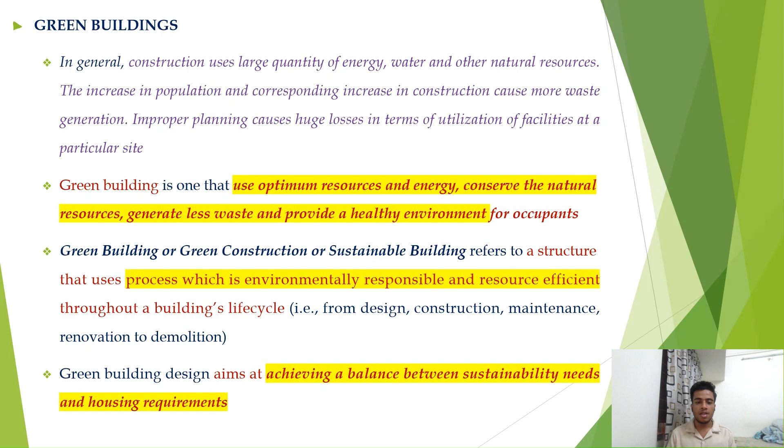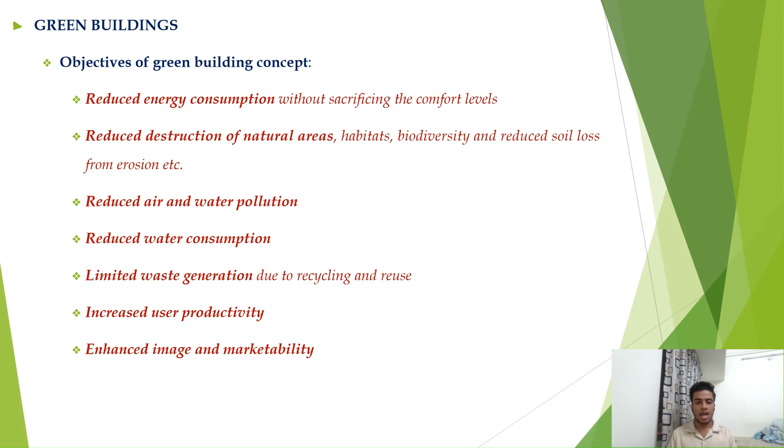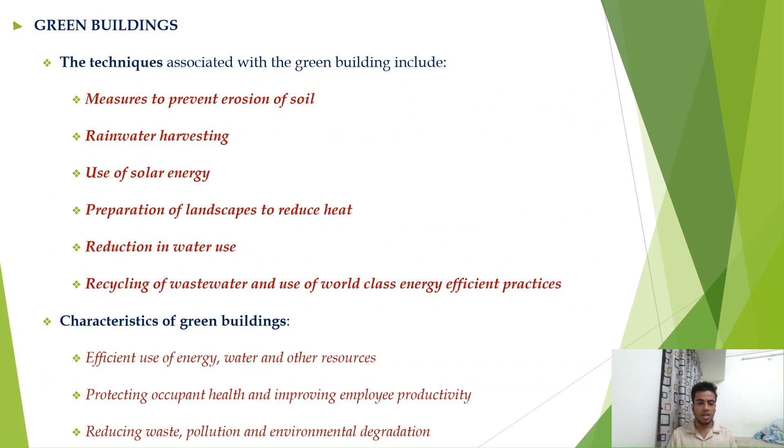The techniques associated with green building include measures to prevent erosion of soil, rainwater harvesting, use of solar energy, preparation of landscape to reduce heat, reduction in water use, recycling of wastewater, and use of world-class energy efficient practices. Efficient use of energy, water, and other resources, protecting occupant health and improving employee productivity, reducing waste, pollution and environmental degradation.

Some of the key features are proper site selection. Site selection is crucial for many reasons. It is important to be close to roads, schools, and amenities as it lowers living cost and avoids wasting resources. It should consider the environmental concern, that is, whether there is any destruction of forest, wetlands, agricultural land, proper orientation of housing facilities, natural ventilation, heating or cooling, and thus energy consumption for these processes can be reduced.

Also, the possibility of harnessing sunlight must be utilized in order to use it for natural lighting, heating, or electrification. Structural design efficiency. In the design phase of a building, it is very important to consider the life cycle of materials used. Each building material and its effect on occupants, resources, and the environment must be checked properly. Materials harmful to the environment must be avoided and alternatives must be used creatively.

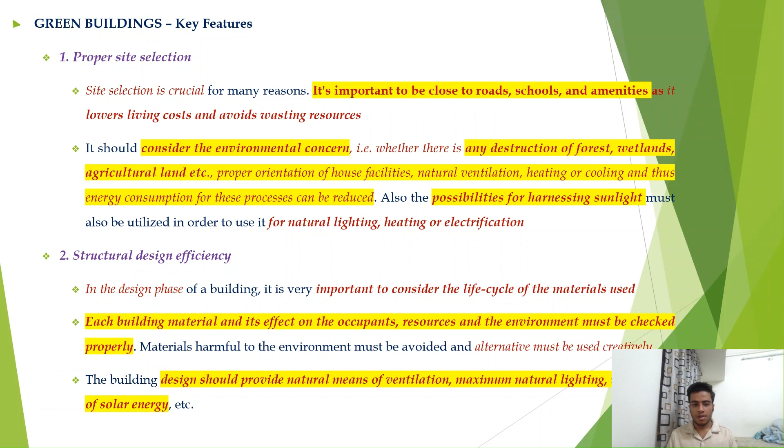The building design should provide natural means of ventilation, maximum natural lighting, utilization of solar energy, etc. It should be a priority from the beginning of the installation and maintained throughout the entire process. During the construction, building materials and processes must have low energy consumption. During operation, if windows and the ventilation are properly placed, the energy required for heating, ventilation, and air conditioning (HVAC) can be minimized.

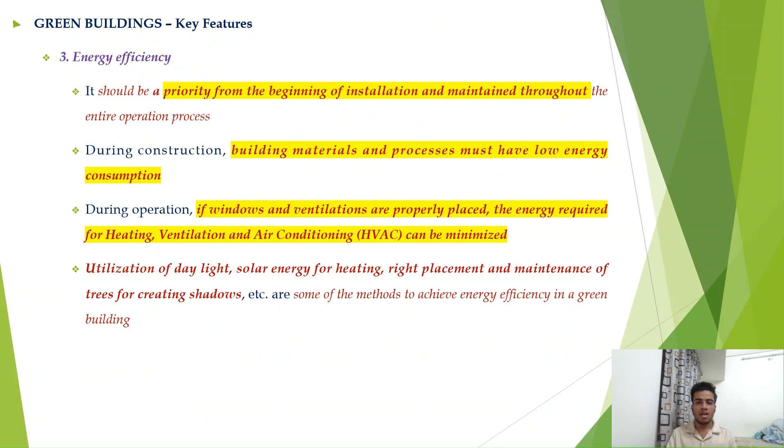And water efficiency. Reduction in water consumption and protecting water quality are equally important. In green building, both these requirements must be addressed. Facilities for water collection, treatment, recycling, and reuse are important factors in the implementation of green building. Water harvesting must be done properly to collect fresh water available from nature.

An ultra low flush toilet, which uses as little as 6 liters of water per flush as opposed to 13 to 15 liters in conventional flush tanks, and low flow shower heads are examples of water conserving devices in green building.

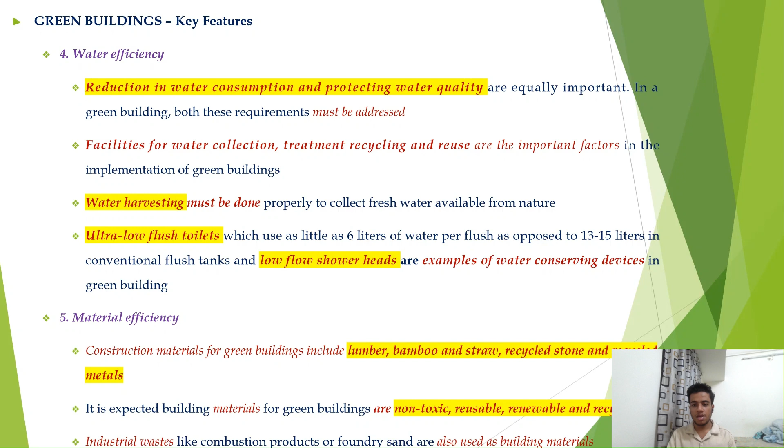Material efficiency. Construction materials for green building include lumber, bamboo, straw, recycled stone and recycled metals. It is expected that materials for green building are non-toxic, reusable, renewable, and recyclable.

Indoor environment quality enhancement. The three important parameters coming under this objective are indoor air quality, thermal quality, and lighting quality. In indoor air quality, the main issues include the reduction of volatile organic compounds and moisture, which can cause bad odor and toxic emissions and presence of bacteria. The HVAC system, the building design and materials should be used to naturally regulate the indoor environment whenever possible.

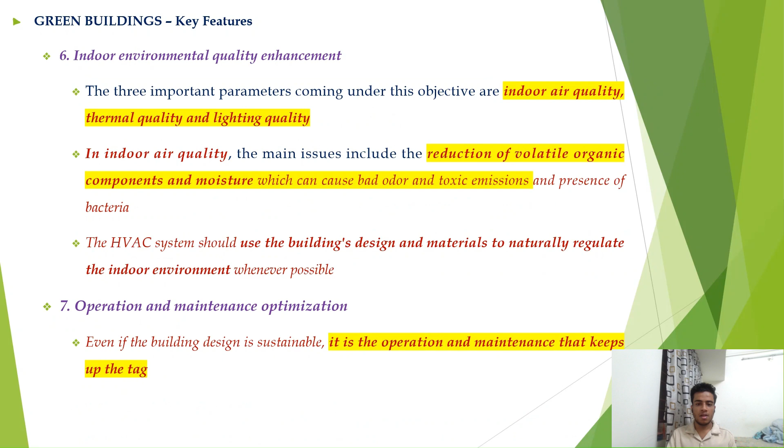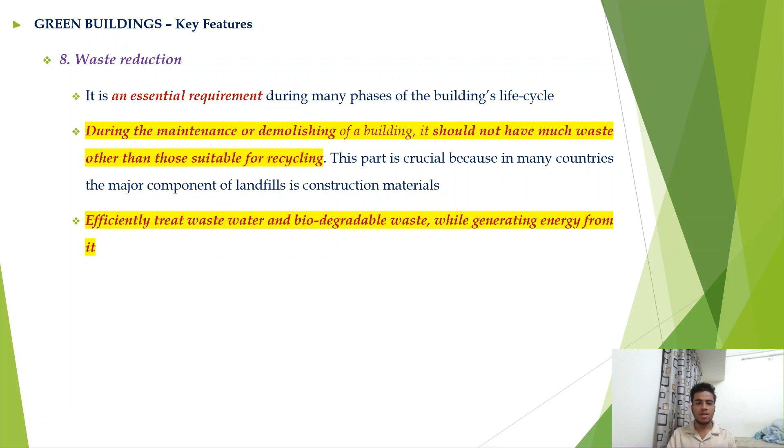Operation and maintenance optimization. Even if the building design is sustainable, it is the operation and maintenance that keep up the tag. Waste reduction. It is an essential requirement during many phases of the building's life cycle. During the maintenance or demolition of the building, it should not have much waste other than that suitable for recycling. This part is crucial because in many countries the major component of landfills is construction material. Efficiently treat wastewater and biodegradables while generating energy from it.

The green building materials for building. Green building materials, also called eco-friendly materials, are those which are locally produced, sourced, or recycled. They are building construction materials that have a low environmental impact. They are composed of renewable resources rather than non-renewable resources. These have to be natural and will not be spoiled by heat, humidity, or cold.

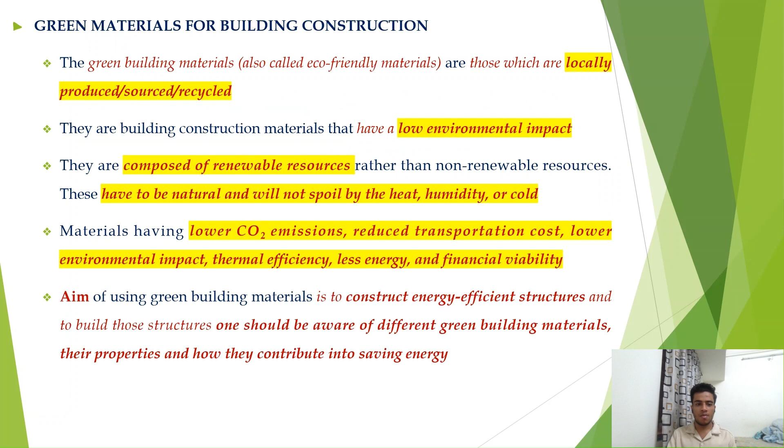Materials having lower CO2 emission, reduced transportation cost, lower environmental impact, efficiency, less energy, and financial viability. So, green materials for building construction are earthen materials, wood, bamboo, insulated concrete forms, straw bale, earth bags, slate, stone, roofing, steel.

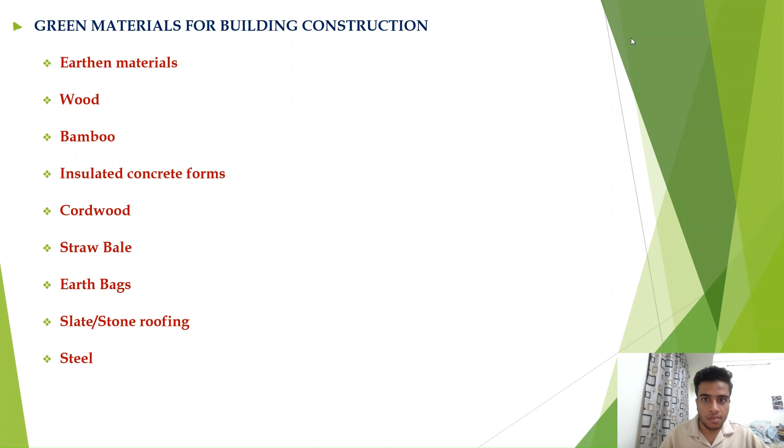So, first one is earthen materials and wood. Earthen materials like adobe, cob, and rammed earth are being used for construction purposes. To increase their strength and durability, chopped straw, grass, and other fibrous materials are added to earthen material. Wood is one of the most common building materials used around the world. This wastage can also be used to make structural parts like walls, boards, doors, etc. in the form of engineered wood.

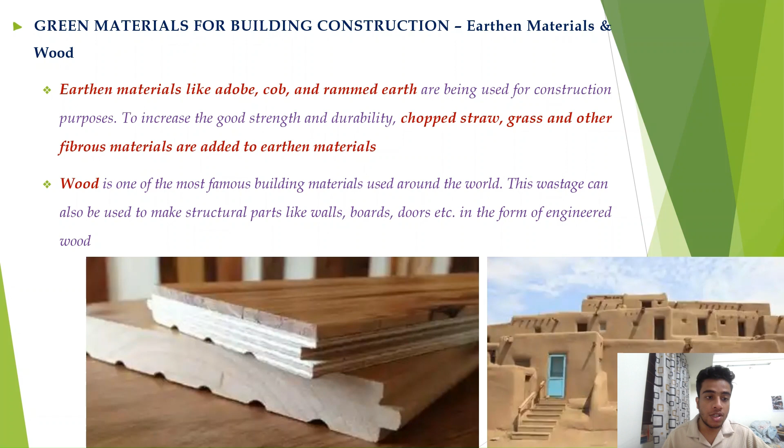Next one is bamboo. Bamboo is one of the most famous multi-purpose and durable materials used in construction. These trees grow faster irrespective of climatic conditions, which makes it economical as well. They can be used to construct frames or support walls, floors, etc. They provide a good appearance to the structure.

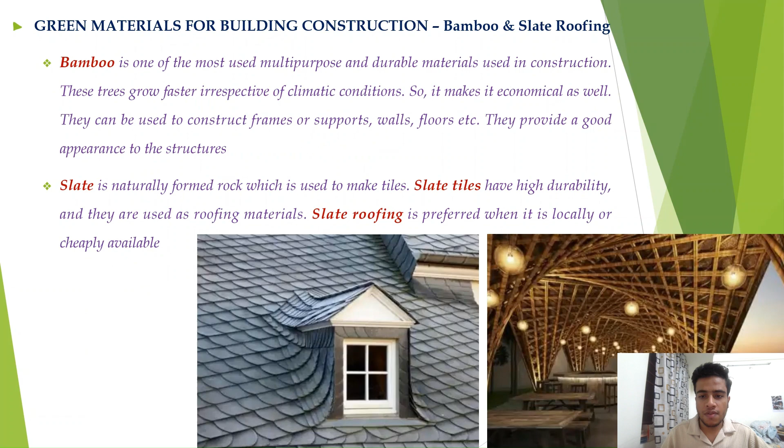Slate is a naturally formed rock which is used to make tiles. Slate tiles have high durability and these are used as roofing materials. Slate roofing is preferred when it's locally or cheaply available.

Earth bags or sand bags are used to construct walls of the structure. These types of structures can be seen in military bases, near banks of rivers, etc. Generally, bags made of burlap are recommended, but they may rot very easily, and hence polypropylene bags are used nowadays.

Insulated concrete forms contain two insulation layers with some space in between them. This space contains some arrangement for holding reinforcement bars. After placing reinforcement, concrete is poured into the space. They are lightweight, fire resistant, low density, and have good thermal and sound insulation properties.

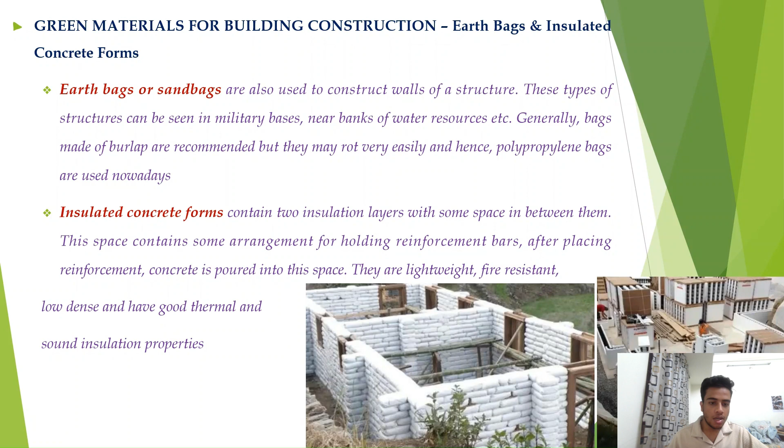Resource efficiency. It means using the earth's limited resources in a sustainable manner while minimizing the impact on the environment. Recycled content: the total percentage of recovered materials in a product, including pre-consumer and post-consumer materials. Renewable energy derived from natural sources. Efficient manufacturing processes create products with the lowest possible cost, etc., and local availability and easily recyclable.

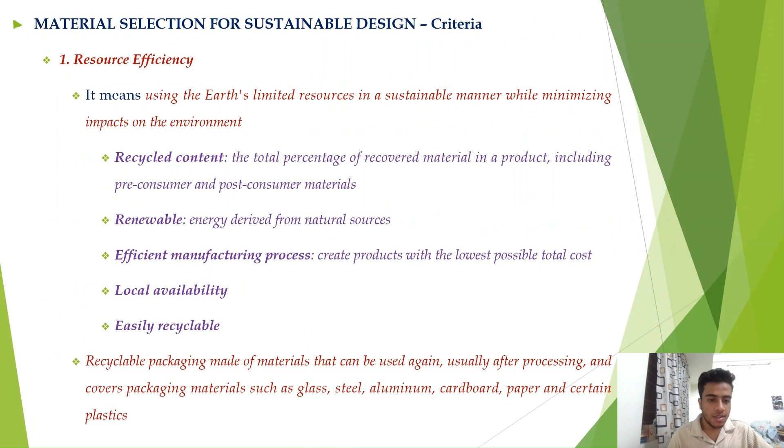Then second one is energy conservation. Energy conservation is the decision and practice of using less energy. Water conservation is the practice of using water efficiently to reduce unnecessary water use. Indoor environmental quality: moisture resistant, minimal emission, healthy cleaning or maintenance. Cost efficiency: installation, maintenance, and within the specification of the project budget.

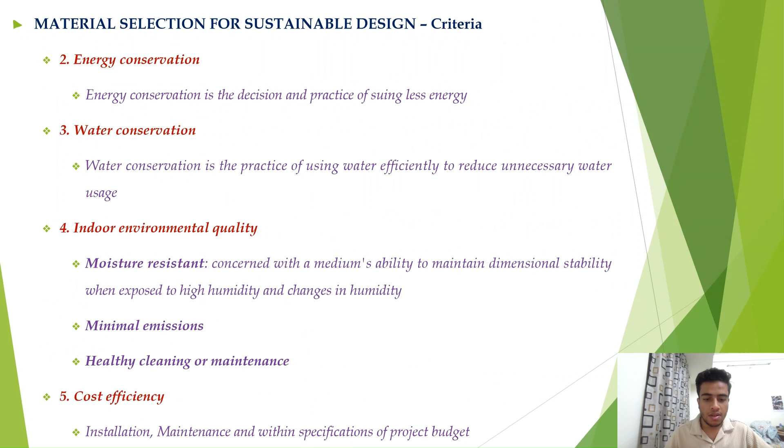The energy efficient green building concept is followed by many construction firms. In order to fix the standards, several criteria are considered important, and based on these, ratings are provided for green buildings. The primary rating systems are GRIHA, Green Rating for Integrated Habitat Assessment, and LEED, Leadership in Energy and Environmental Design.

So, GRIHA rating. This rating system has 34 criteria, out of which 8 are mandatory, 4 are partly mandatory, and others are optional. Based on compliance to these criteria, points are fixed. The maximum score is 100. Based on points obtained, there will be a star rating ranging from 1 to 5.

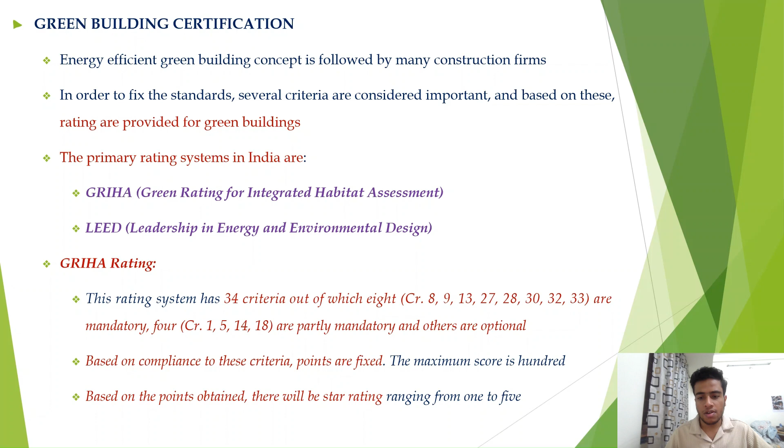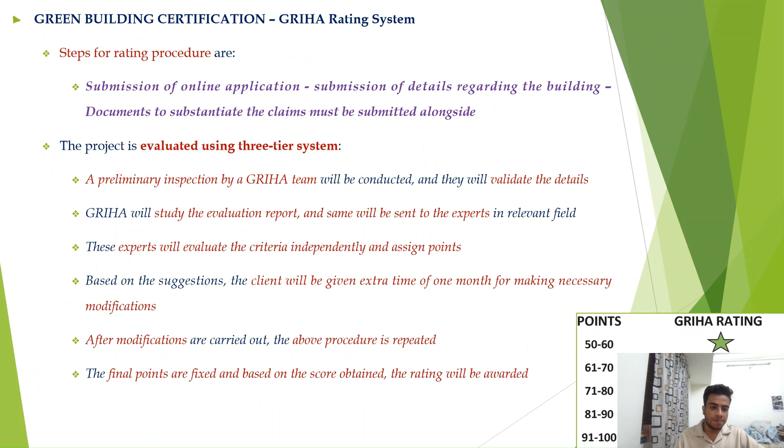GRIHA will study the evaluation report, and the same will be sent to experts in the relevant field. These experts will evaluate the criteria independently and assign points. Based on the suggestions, the client will be given extra time of one month for making necessary modifications. After modifications are carried out, the above procedure is repeated. The final points are fixed, and based on the score obtained, the rating will be awarded.

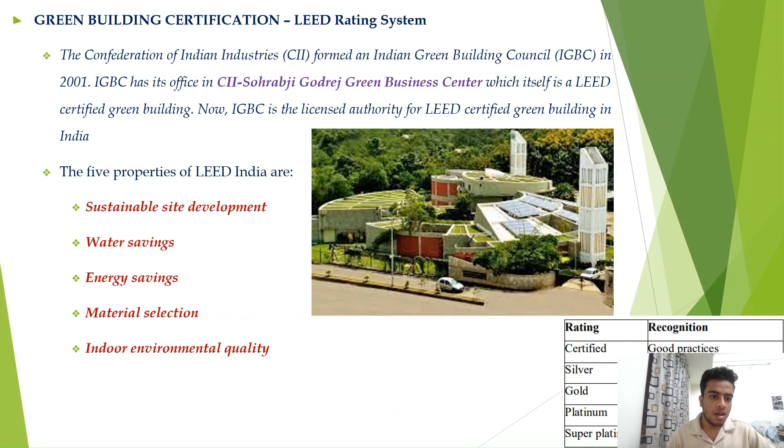The Confederation of Indian Industries formed IGBC in 2001. IGBC has its office in the Sohrabji Godrej Green Business Centre, which is itself a LEED certified green building. Now IGBC has licensing authority for LEED certified buildings in India. The five properties of LEED India are sustainable site development, water saving, energy saving, material selection, and indoor environmental quality.

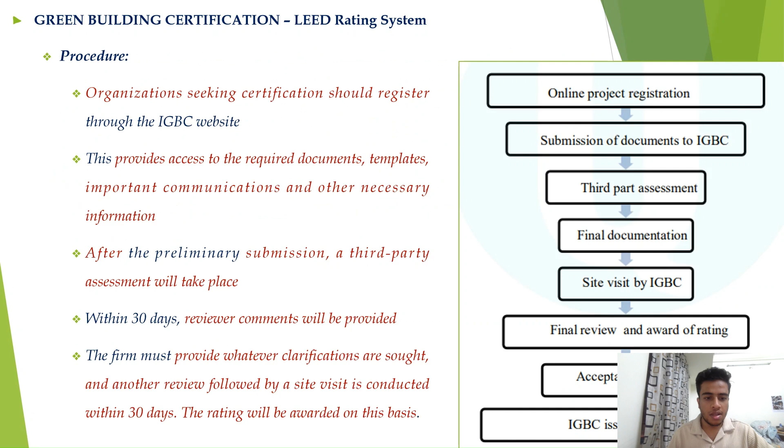So the procedure for the LEED rating system: organizations seeking certification should register through the IGBC website. This provides access to required documents, templates, important communication, and other necessary information. After the preliminary submission, a third party assessment will take place. Within 30 days, review comments will be provided. Whatever clarifications are sought must be provided, and another review followed by a site visit is conducted within 30 days. The rating will be awarded on the basis of this.